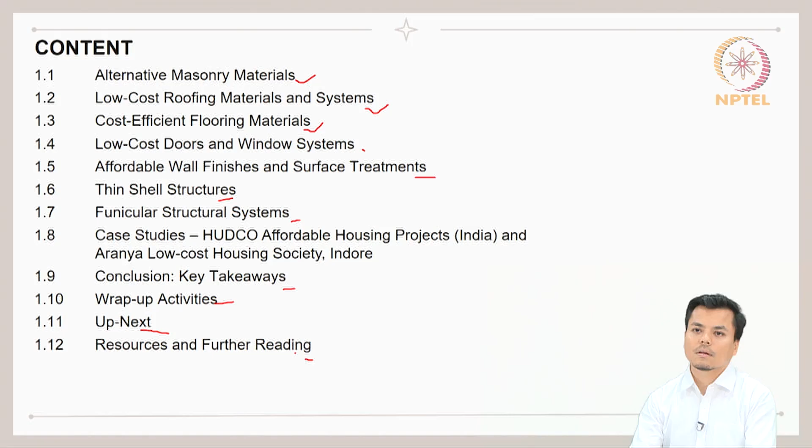Let us now revise what was covered in the previous presentation. We had focused on the prominent architect Laurie Baker, who invented techniques like rat trap bond and filler slabs, which reduce construction cost effectively because the usage of concrete and artificial cooling of interior spaces is minimized. We also understood how the use of local materials like brick, mud, and stones improved the affordability and sustainability of construction.

We also observed that climate responsive design enhances thermal comfort and reduces energy consumption while the building is constructed. We explored Auroville Earth Institute's use of CSEB blocks as cost effective alternatives to conventional bricks, and we recognized the importance of eco-friendly construction and reduced carbon footprint, which has a considerable impact on overall carbon emissions during and after construction. These are some important learnings covered in the previous presentation.

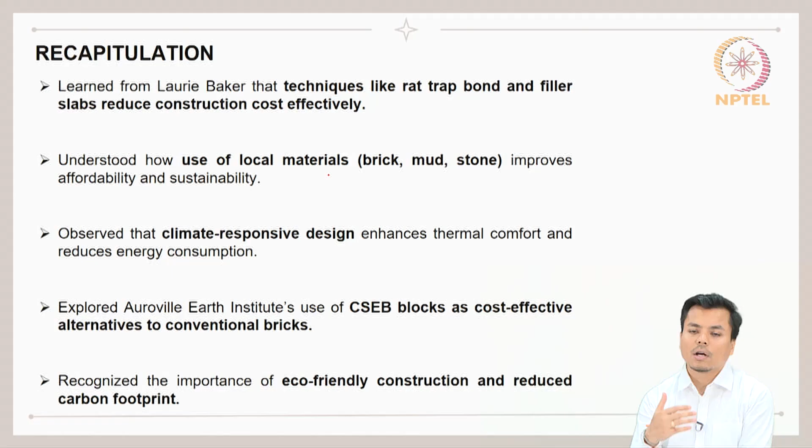If you want to understand more about these points, go back to the previous presentation and re-look into the content covered there. Moving forward, as mentioned in the content, we will first understand some of the alternative masonry materials.

First among them is fly ash bricks, made from fly ash, lime, gypsum, and sand. Fly ash is a byproduct of thermal power plants, and if you have seen any thermal power plant, you will see heaps of such fly ash produced there, kept at the site, in the corners of such thermal power plants.

During heavy winds, as these power plants are constructed in the outer areas of the city where not much vegetation is present, strong winds flow through these outer areas and the fly ash moves with the wind, creating an environmental havoc in nearby areas. That is why an alternative was thought of: why not make a brick out of fly ash? That is where the use of fly ash for construction started.

Similarly, there are a few examples of waste materials now used in bricks, and continuous research and development is going on in this sector, utilizing waste products to form blocks which can then be used for construction, especially in masonry construction. In fly ash bricks, the water absorption capacity is also less, about 20 to 30% less water absorption happens in fly ash bricks.

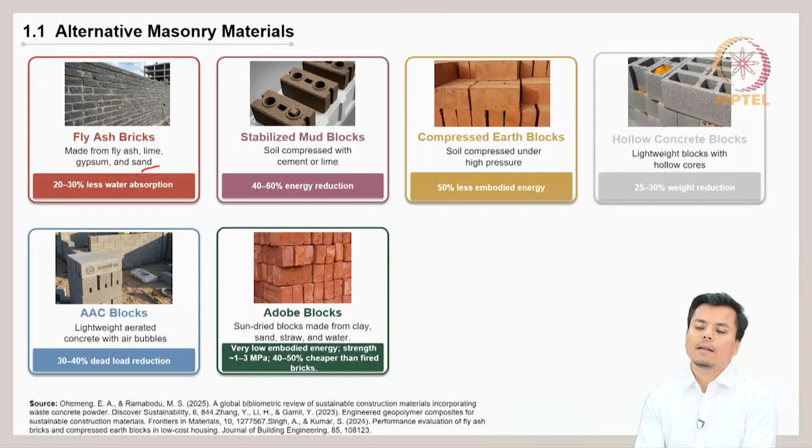If we see the overall cost reduction when using alternative masonry materials, the key benefit is that about 20 to 50% cost saving is possible with such low-cost masonry materials. Overall, it reduces construction cost due to less material and labor usage possible with the use of such alternative masonry materials.

Then the next is use of local and waste materials, like utilizing fly ash, soil and other locally available resources—for example, the leftover after juice is extracted from sugarcane, plus all the dried leaves that are present.

These materials can also be experimented with, and there has been detailed study on how they can be reused in the form of blocks for construction. Continuous study is going on, so you can also explore further about these recent developments in the building industry, especially the R&D on utilizing waste or byproducts of nature for construction.

This is to make construction less unsustainable, minimizing the unsustainability created because of the usage of high embodied energy materials.

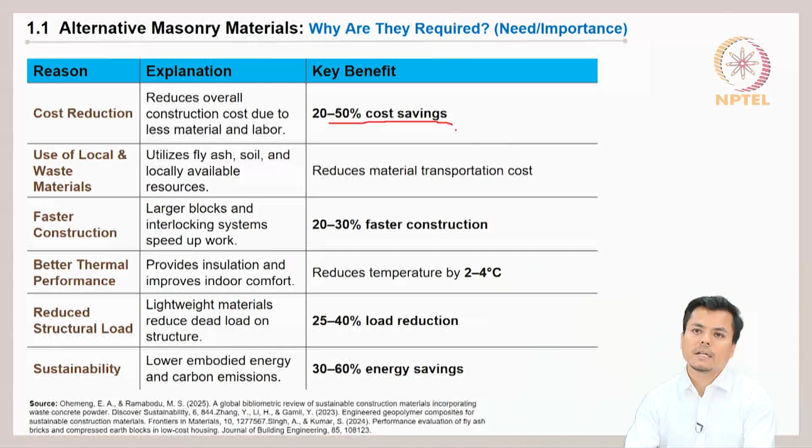Then there are some other options for low cost roofing materials and systems, like CGI sheets, that is corrugated galvanized iron sheets, which we have seen in the roofs of many buildings. The weight of this material is somewhere around 5 to 8 kg per square meter, and installation is also faster compared to the conventional RCC slab.

In regions where RCC slabs are not fit for use, especially areas with heavy rainfall, the flat terrace is actually not a good solution, though we often construct it. It is true to some extent that earlier roofing sheets would get corroded very easily, leading to leakage of water and increased maintenance cost. In spite of this, because of the minimal construction cost of CGI sheets, people go for such roofs in regions with extreme rainfall and snowfall.

But now the quality of these sheets has improved, and if we use them, there is no issue regarding leakage or entry of water from the roof for a long period of time.

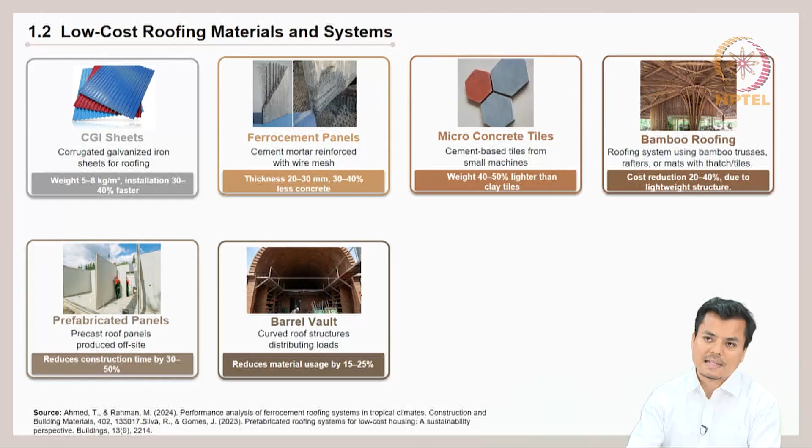Overall, the cost efficiency we get out of these alternate roofing materials is that they reduce construction cost by 20 to 40%. They are structurally lightweight compared to RCC slab, and faster in construction because they are prefabricated - these simple systems reduce construction time since they are manufactured in industry and just have to be brought to site and installed.

In terms of resource efficiency, it saves 30 to 40% of cement and steel that is utilized. Thermal comfort is also better, providing improved insulation and indoor comfort.

Rising construction cost is an issue here - conventional roofing systems are expensive and resource intensive, so these alternative solutions provide some relief. In terms of housing demand, they support affordable and mass housing projects, and they also reduce environmental issues like minimizing carbon emissions, with overall less environmental impact because of these materials.

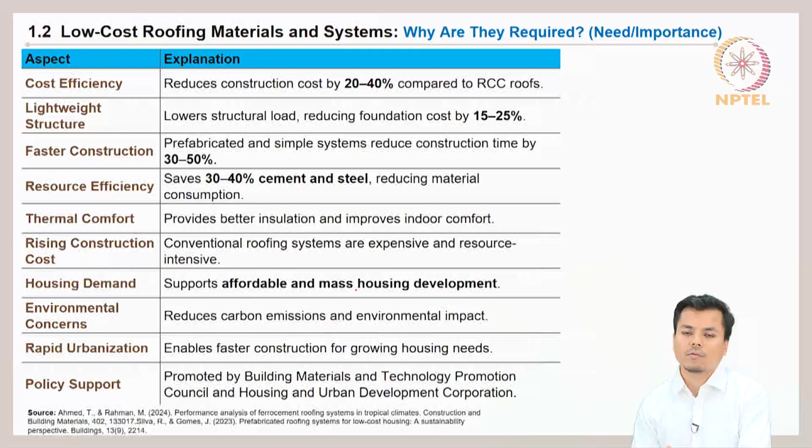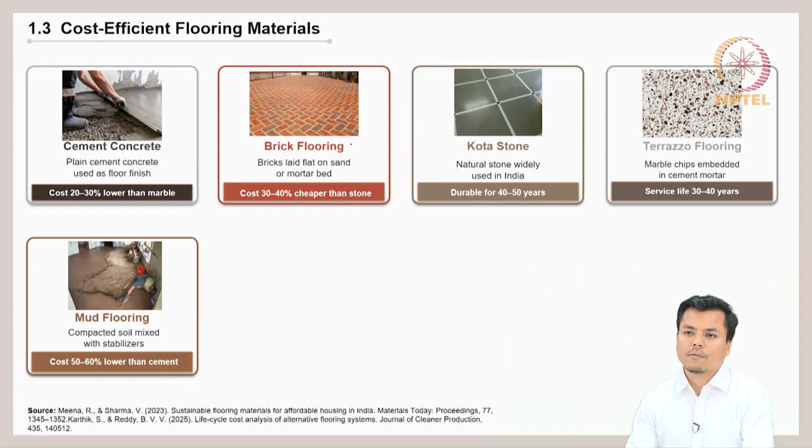Next, some other alternatives for flooring materials, especially compared with cement concrete versus tiles, that is ceramic tiles or vitrified tiles. These are some alternatives for flooring as well as examples for roofing. So cement concrete is provided here, then brick flooring, Kota stone, terrazzo flooring, and mud flooring.

Overall, in case of flooring material, in terms of cost efficiency, the flooring cost is reduced by 20 to 60% when compared with conventional flooring materials like tiles and other materials. So that is the advantage here. Even compared with marble and granite flooring, there is good saving because of the use of such alternative construction material.

In terms of durability, materials like Kota stone and terrazzo flooring last for around 30 to 50 years without any cracks, so that is also an advantage. Low maintenance requires minimal upkeep and reduces long term expenses.

Another alternative, mostly seen in coastal areas, is the use of red oxide for flooring. Red oxide flooring in warm and humid regions provides relief from quick heating up of the flooring due to extreme sun. Mostly in coastal areas like Mangalore, Goa, and Thiruvananthapuram, you will find houses where red oxide flooring is done, so it is very prevalent in that region and is also an alternative flooring material that is used.

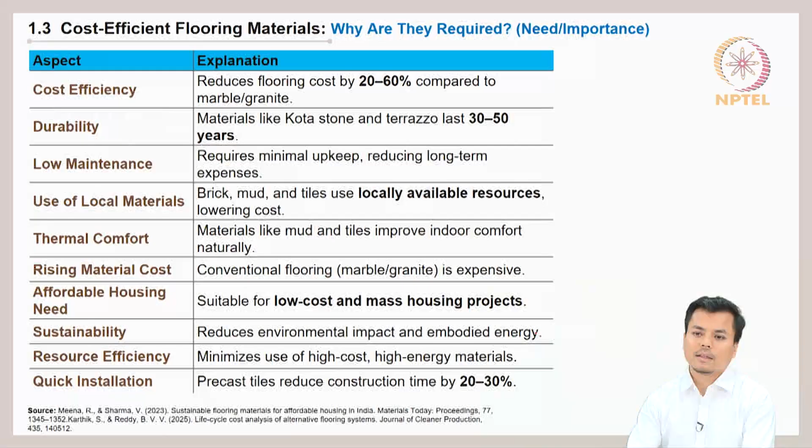That is where we minimize the cost, and it is also used for affordable housing projects, where we promote sustainability, resource efficiency, and quick installation. There, precast tiles can be used for saving time.

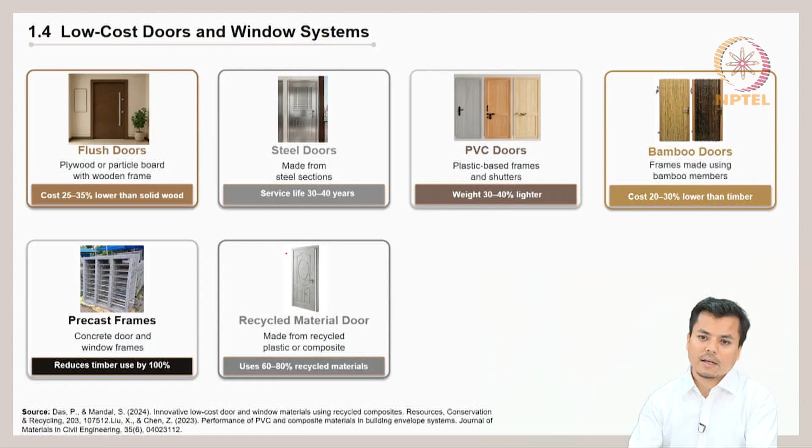Next, some low cost doors and windows used in the construction industry include flush doors, steel doors, PVC doors, bamboo doors, precast frames, and recycled material doors. These are alternative materials to the conventional use of timber for doors and windows.

In terms of cost efficiency, since the cost of timber is increasing day by day, using these alternative materials for doors and windows minimizes the cost by around 20 to 30%.

Durability-wise, precast frames, steel and PVC doors last somewhere between 30 to 40 years with low maintenance. Timber doors and windows require regular polishing and painting, but PVC and other alternatives like bamboo doors and windows need no such regular maintenance.

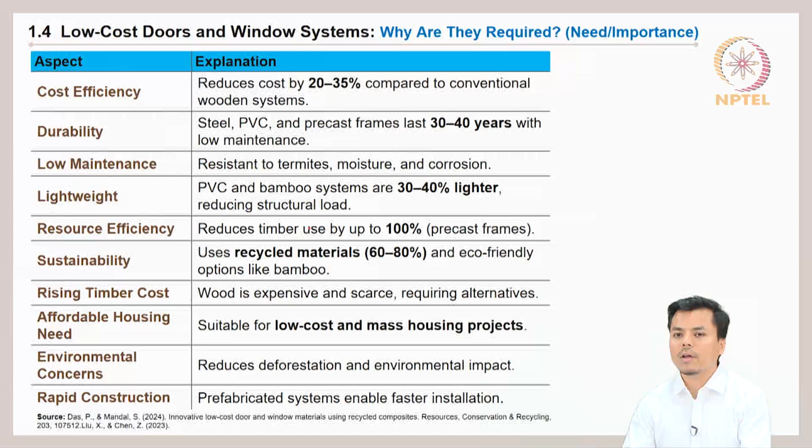It is also lightweight, which is an added advantage. Resource efficiency reduces the use of timber by around 100% with precast frames, since entire door and window frames are now available in the market as precast materials. That's why most affordable housing projects use such precast frames.

In terms of wall finishes and surface treatment for low cost buildings, there's cement plaster, lime plaster, exposed brick, and textured finish achieved through the plastering technique. A rough texture can be created on the surface if needed, reducing cost by around 15 to 20%.

Another option is whitewashing the entire wall with lime. Stone cladding is also an option, where a thin stone layer is applied on the wall surface, increasing durability so that for 50 plus years there's no need for regular maintenance.

Obviously, cladding increases the cost at that point, but when compared to the maintenance cost of regular painting and upkeep of walls over the long term, such cladding is much more beneficial.

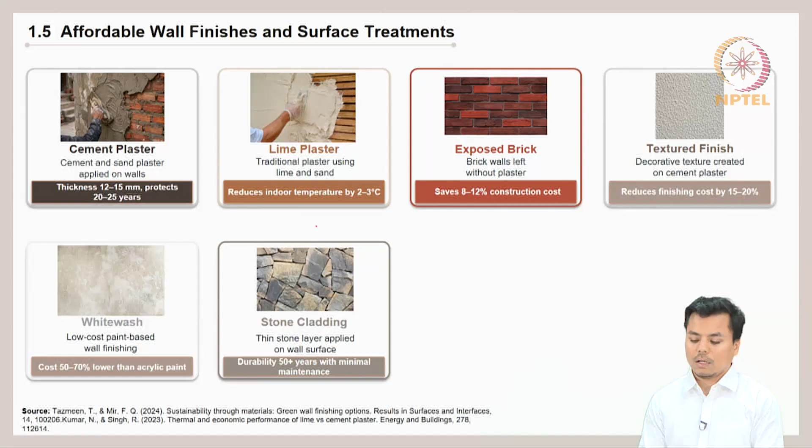Overall, the cost efficiency from using such alternative materials shows 15 to 50% of cost minimized. Durability is 20 to 50 plus years if we use cement plaster and stone cladding, with no need for regular maintenance.

The use of local material is promoted. Thermal comfort improves, as using lime and whitewash lowers the temperature considerably. It also reduces the finishing need if we go for exposed brickwork, with the only condition being that we must use good quality brick, like A class brick, for construction.

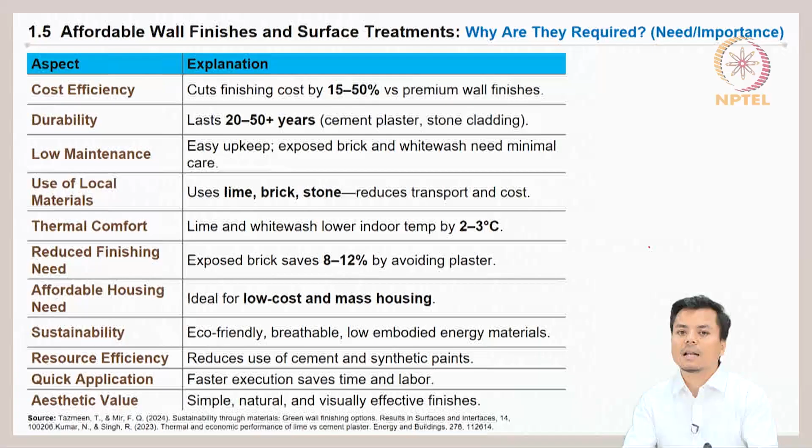Let us now look into alternative roofing material like thin shell structures. The example shown here is the oceanarium in Spain, a kind of museum for the ocean. You can see the roof constructed here — a curved structure with thickness usually 30 to 100 mm.

Such thin shell structures transfer load mainly through compression and tension. In terms of material economy, they use less material compared to flat slabs. The main advantage is architectural flexibility, allowing aesthetically pleasing curved forms. Materials used include reinforced concrete, ferrocement, and steel.

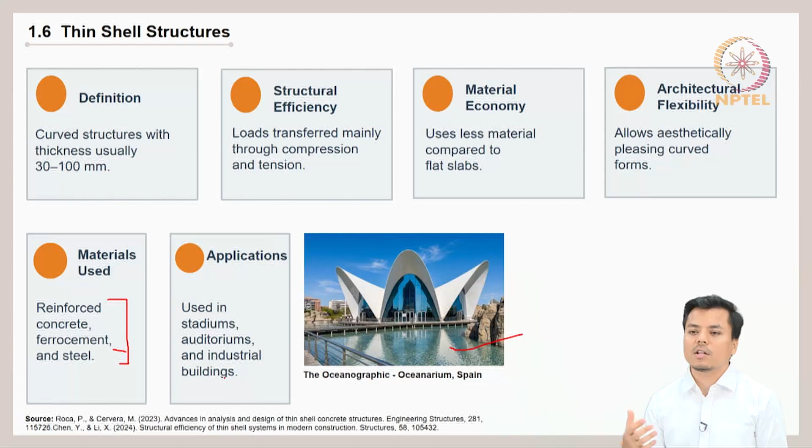These are some options for construction, but predominantly ferrocement would be a better material for low cost construction. Applications are used in stadiums, auditoriums, and industrial buildings where uninterrupted, column-free space is needed in the activity area — thin shell structures are very beneficial there.

The other example is the funicular structural system. If we had to construct this entire roof with RCC, the construction cost would have been much higher.

The structure is shaped according to the natural load distribution pattern, so the force is transferred mainly through compression or tension. The material efficiency here is comparatively higher, reducing bending stress and material usage.

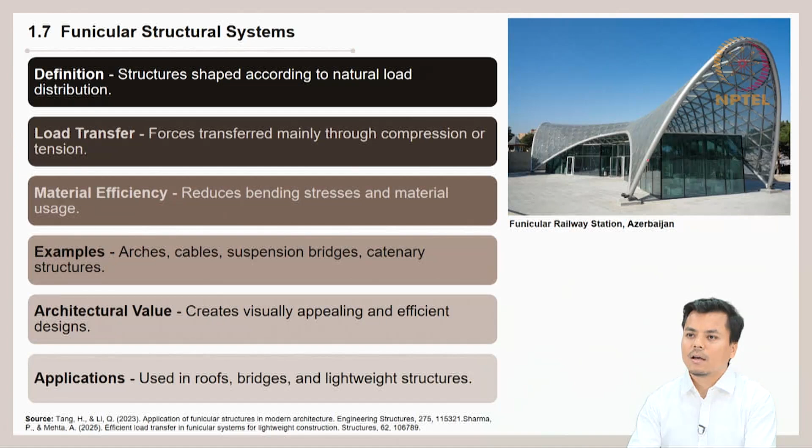Examples include arches, cables, suspension bridges, catenary structures. This is an example of a railway station in Azerbaijan, where the terminal is covered with such a funicular roof system.

If we see the case studies for such alternate roofing material, flooring material or materials for walls, we can quote some examples of projects developed by HUDCO affordable housing projects in India. They promote the use of precast components and low cost materials, use of precast doors and window frames, reduce timber usage, and also include cement and terrazzo flooring for cost efficiency. Further, it achieved generally, compared to other projects, 15 to 25% cost reduction, with a focus on scalability and urban affordable housing projects.

So you can explore further some of these projects completed by HUDCO and understand how these alternate materials are used in construction.

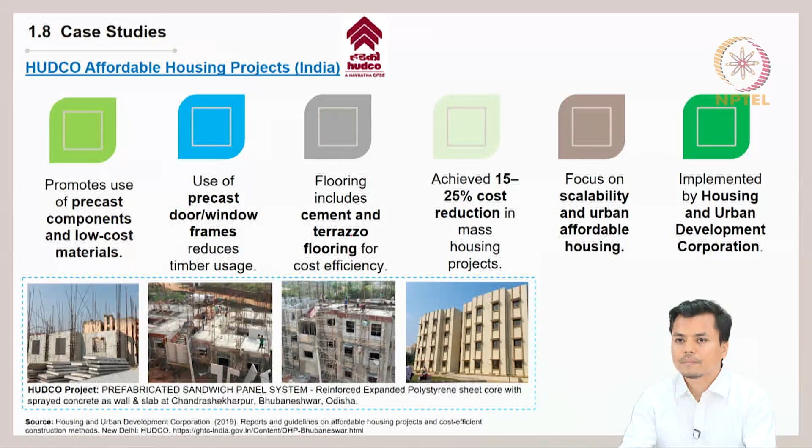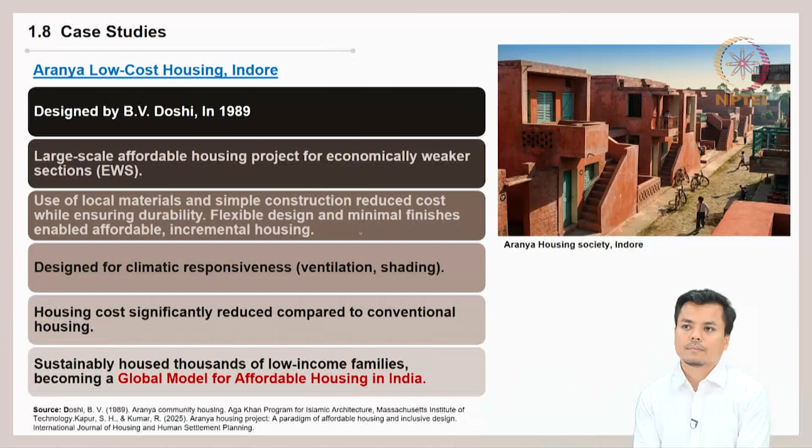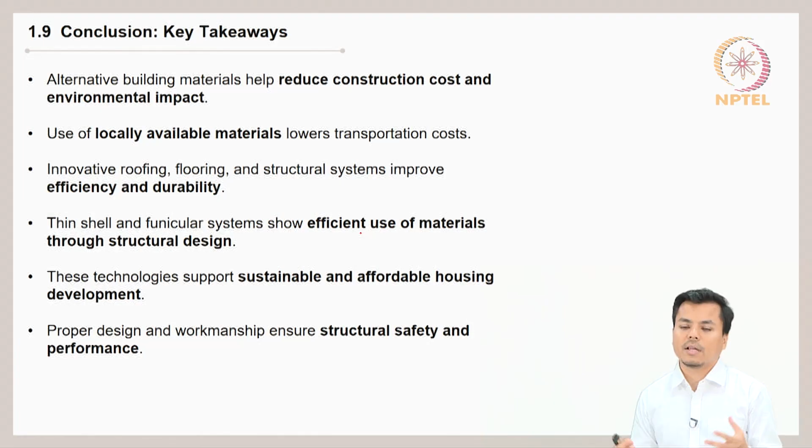These technologies support sustainable and affordable housing development, and with proper design and workmanship it can be ensured that the structural safety and performance of these buildings are improved.

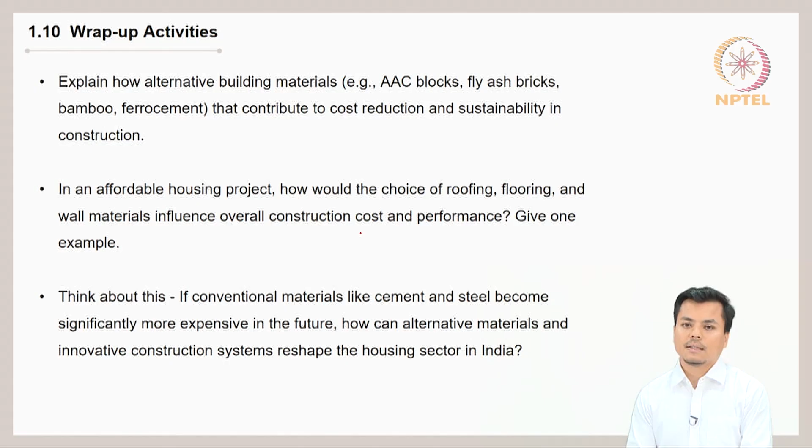There will be a time when the availability of these materials will be a question, because these are all non-renewable resources. So in that circumstance, how can alternative materials and innovative construction systems reshape the housing sector in India? You can imagine this and come up with some alternative answers.

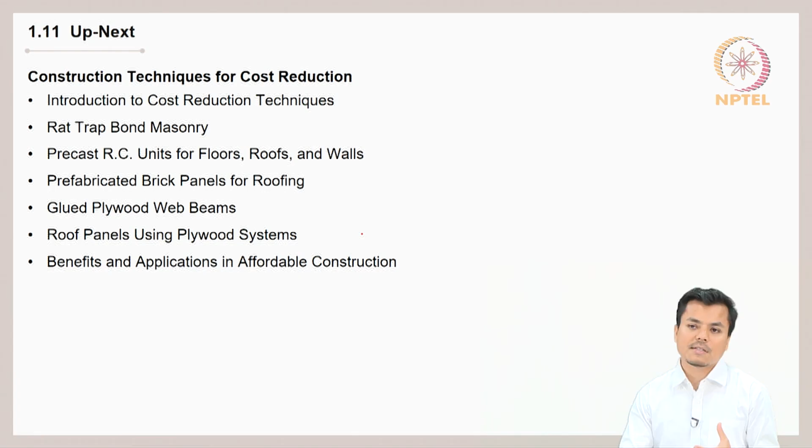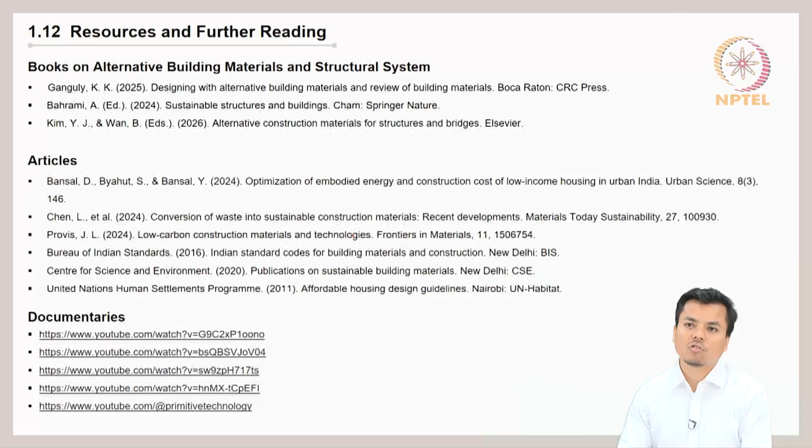In our next presentation, we will understand some specific techniques adopted in low cost construction, like rat trap bond, precast RCC units, prefabricated panels, glued plywood web beams or roof panels using plywood systems. All this will be covered in the next presentation, and these are some references which you can refer to, to understand more about sustainable architecture and low cost building materials and systems.

So with this I would like to conclude my presentation, and I hope that the learnings on alternate building materials, especially in this lecture, are helpful for you to make a decision and also recommend them to anyone looking for low cost building material options. Thank you for your patience listening.